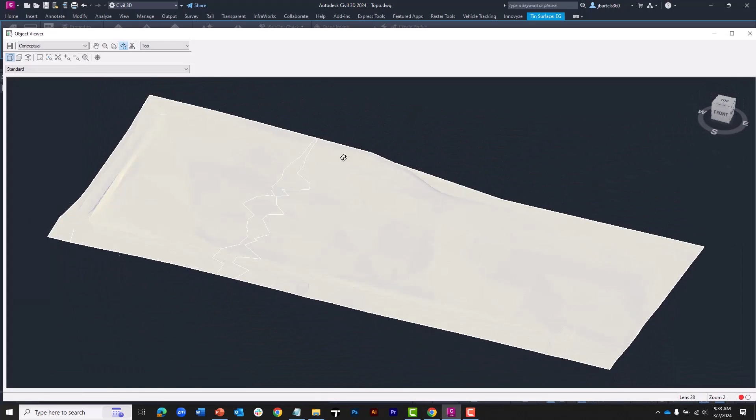What we see on screen is an example of the topography the surveyors have been working on within their team space. We'll say they've been creating break lines, assigning points, and making edits to this. At this point now that it's ready to be shared, we can share it. I just wanted you to see it. In fact, if I click on this for a second, we can bring this up in the object viewer—that's just a rough idea of what this surface looks like. Let's close that up, and I'm going to close this.

To share the file, they are going to go to their web browser to create the package. I'm going to simulate that I'm Morty. Let me click to go into another web browser here, and I will go into the Autodesk Construction Cloud. We are going to log in as Morty—I'm going to put in his username and password. When Morty gets into the cloud, we'll grab that Briarwood Phase 1 project.

Notice what Morty can see in here—these are the only folders for which Morty has rights. From here, I'm going to go to Design Collaboration.

When I go to Design Collaboration, it reverts to the home screen. This is where I can see the name of the current team, surveyors, and down below I can see the contents of their team space—Topo.dwg. Remember, they had the Alta file and the other one, but we're not seeing that because it's only looking at the base DWGs folder.

When they want to share, they will do that using a timeline. We can access the timeline by clicking this button at the top—it's a lot like a drawer. When I click, that will open up. From here, we can see the timeline associated with each team. Now, I'm not seeing the engineer team yet. I won't see that timeline until the engineer actually shares something. So for right now, this is just showing us the word shared.

The way the timelines work, we can see that it's colorized based on a unit of time, and these are days currently. We can navigate this by dragging these sliders left and right to reduce the number of days, then drag this back and forth. I can also put my cursor inside this timeline and roll the wheel back and forth, or hold the left mouse button down if I'm zoomed in to drag left and right.

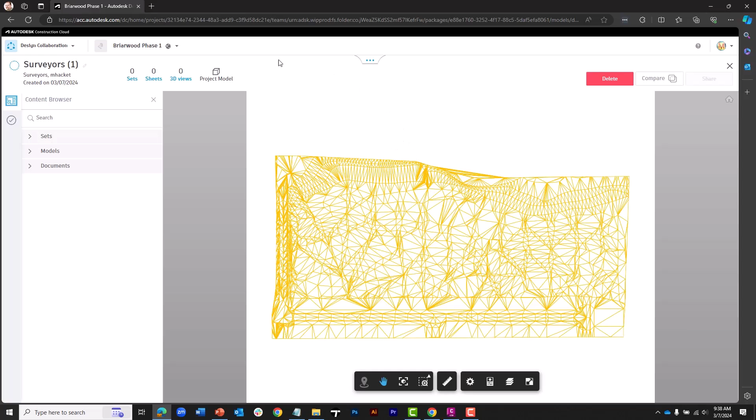To create a package, I'm going to come down and click the Add button. When you click the Add button, it will open up this area where we can generate the package. We can give the package a name. I can call this Topo Share, and I can click the check. Down here is where I can select the objects within my team space that I would like to share. We can share sets. Now, this is a Revit thing, so we don't have to worry about sets.

If I expand models, this shows us the DWG files or the models that are within our team space. Once again, another great reason for minimizing things. I'm going to choose that topo file. And then documents, I can share Word documents, PDFs, things like that. If I click Add Documents, currently it's going to say it doesn't find anything because it's only looking in that base DWGs folder. If I had a Documents folder and I put documents in there, I could attach documents to this package. Let me close this.

Think of a package as being a lot like a zip file, very similar to that. In this case, I've selected my topo model to share. I'm going to click Save. And when I save that, let me open this drawer up again.

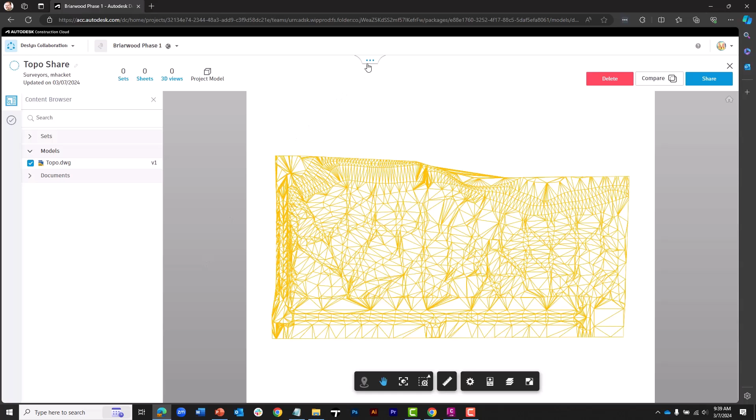I just want to show you the icon. You can see that I've got a circle in the timeline, and it's kind of a dotted edge. This shows us that a package has been created, but it's not yet been shared. The benefit of doing that is we could come back to this later and delete the package. I could also jump in and I could edit this if I wanted to.

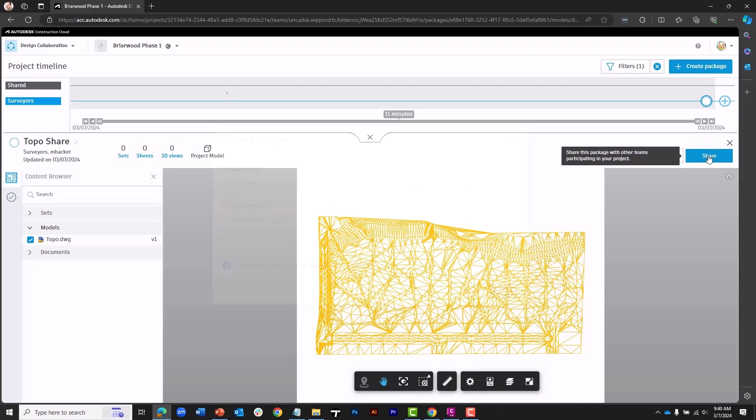I'm going to share it. Let me click Share. When we share a package, I can give it a description. This is the existing ground topography. Let's click Share.

When you share a package, it is replicated into that shared folder. Let me open the drawer up here again, and we can see the icon has changed to a solid circle. This is very easy now. Each team, when you're looking in your team space, you can see if you have saved packages, they'd be open circles, and the closed circles would be ones that you shared.

All right, let's look at things from the engineer's perspective. I'm going to jump to a different browser. I'm in this browser now, operating as the engineering team. Let me go to Home.

When a package is shared, an email can be sent to let the other teams know. To control the emails, here on the Home area of Design Collaboration, there's an email icon. If you click right here is where you can turn on those notifications. That way, each time there's a transaction, you'll be notified. So we'll assume I got that notification.

If I expand the timeline on my end, down below here, I can see my team name and the contents of my team space. I don't have any files in there right now. I can also see the surveyor's timeline or swim lane. This closed circle shows me that they have shared a package.

If I hover over this icon, I can see the name of the package and when it was shared. I'm going to click on this. When I click on the package, I can see the contents down below, the name, the description, and the contents divided up by different types.

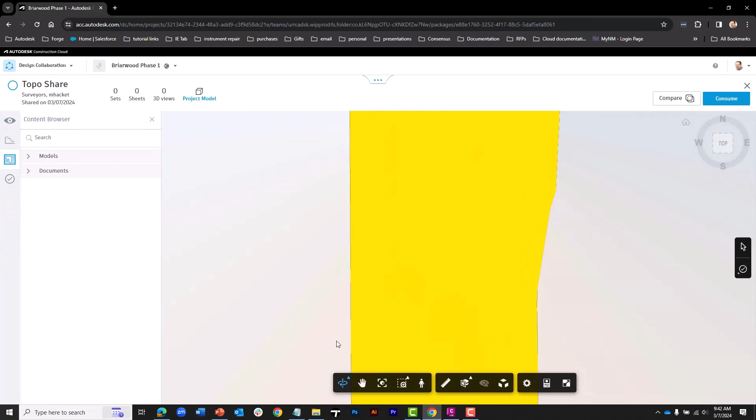It has one model in it. There's the model there. If I want to view that model, I can click Explore. We have a view cube, just like within the Civil 3D environment. I can also zoom extents. The viewer within the web browser is very similar to the object viewer we have in Civil 3D, so this is nice to get a cursory view of this file.

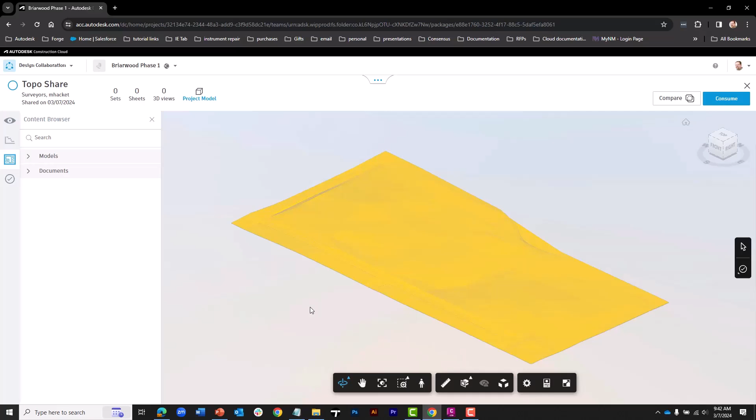If you actually wanted to pull elevations and things like that, the best place to view that would be within Civil 3D. We'll touch on that here in a second. I'm going to click Consume, and I will consume that to my team space.

Let's go back to Docs for a second. I just want to talk about that whole viewing concept. When we created our team spaces, we assigned permissions. As an example, we'll look at this from Morty's perspective. If I right-click on the Surveyor folder and go to Permission Settings, you can see that it gave Morty edit permissions when I set up that team space.

And he would have edit permissions to not only the team space, but to all of the folders below - it's inherited. We saw this when we talked about permissions a few sessions ago. Having said that, if we go to the shared folder, Morty gets edit access to the surveyors folder because when he shares, he needs the ability to edit and place things in there. However, for other team folders, it automatically sets Morty to view only.

So anything that the engineer would share to the shared folder, Morty would be able to open that within Civil 3D and view it and take measurements or elevations or things like that. And you don't have to worry about damaging the file because they don't have the rights to change it. We can see here that under surveyors, that's where the file was shared.

Let's go to engineers. When I consumed it in my consumed folder now, notice great organization - it creates a folder in consumed called surveyors, so I know what team it came from. And there's the file that I consumed from them. Let's create a data shortcut to it.

I am going to jump into Civil 3D, and we're looking at this now from the engineer's perspective. Let's go to Open, and I am going to jump to Autodesk Docs, go to my account, and go to Briarwood. I'm going to be going here a lot. Let me drag that over, I'll create a shortcut to it.

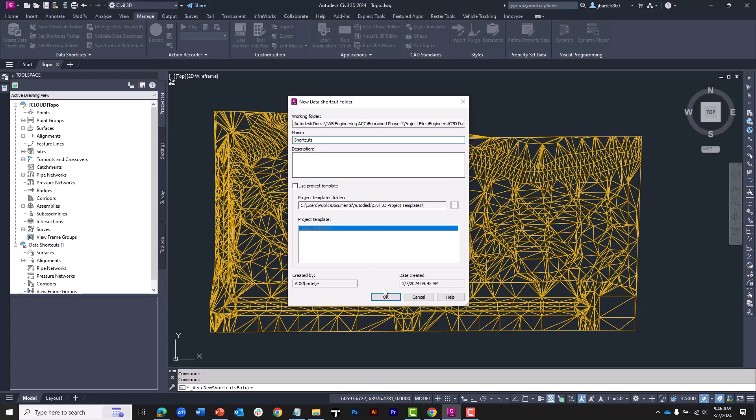That's the nice thing about this concept - each team space can have their own data shortcuts folder within it. I'm going to choose this as the working folder within my team. Let's click Select Folder, and then I will choose New Shortcuts folder. Within that Civil 3D Data folder within my team, I'm just going to create a folder called Shortcuts. You can use the names that you like. I'll click OK - I've set up my data shortcuts for my team. I can now go to Create Data Shortcuts.

I want to add this existing ground surface that I got from the surveyor to my project. Each team is almost like its own project. There's that existing ground surface. I can then close this drawing. Save changes? No, I didn't do anything to the file. I just put a pointer to it.

In fact, it wouldn't make any sense to save it anyway, because if the surveyor puts a new version in the shared folder, when I consume it, it's going to overwrite the one in my consumed folder. You're not supposed to edit things in consumed, because those files are essentially controlled by someone else.

Let's create a new file now. I want to leverage that topo that we got from the surveyor. So I'm going to create a new file. And still as engineer, I'm going to do Save As, and save this in Briarwood Phase 1, in my team space, under base DWGs, and call this Surface Profile.

Now that I've saved this file within the cloud, I can come over and reference that data shortcut that I made. We'll drag this in, and then I will do a zoom extent so we can see that.

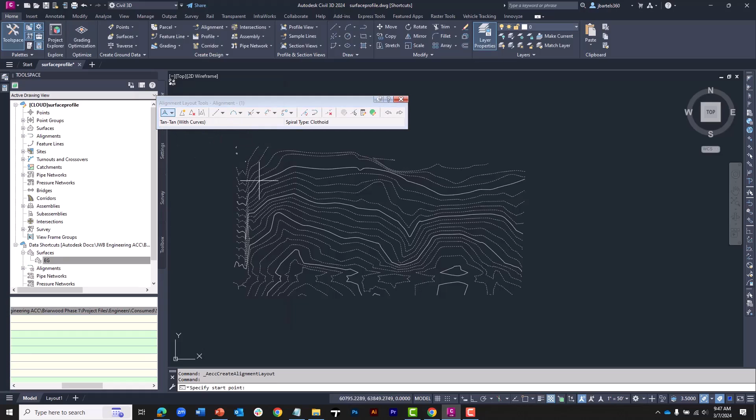And then I'm just going to generate an alignment. We'll create a quick one here just in the interest of time. We'll generate the alignment, won't bother with a name, and I'm going to put some curves in that. Then I will click the alignment and create a surface profile from that.

Let's click Add, Draw on Profile View, Create Profile View, and I'll place that over here. So there is my surface profile through the data that I received from the surveyor. I am going to go ahead and save this drawing, and I will close out.

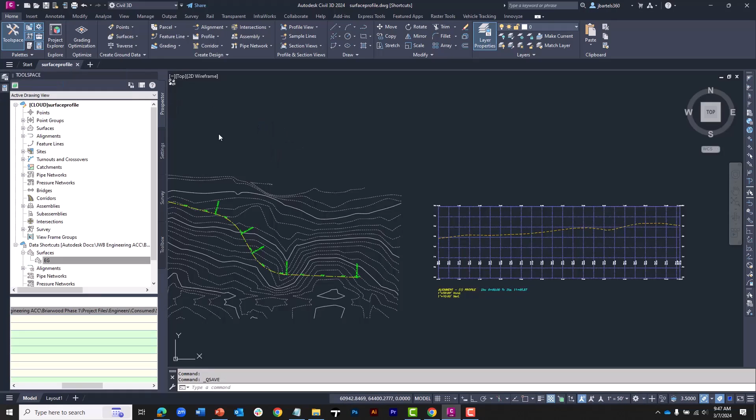Now, let's look at things from Morty's perspective again. Maybe things changed, the existing topography had some updates. We're going to assume we're Morty now. I'm going to go to Open. In the Briarwood Phase 1 project, the surveyor, once again, would only be able to see these two folders. The surveyor would go into base drawings and open up their topography.

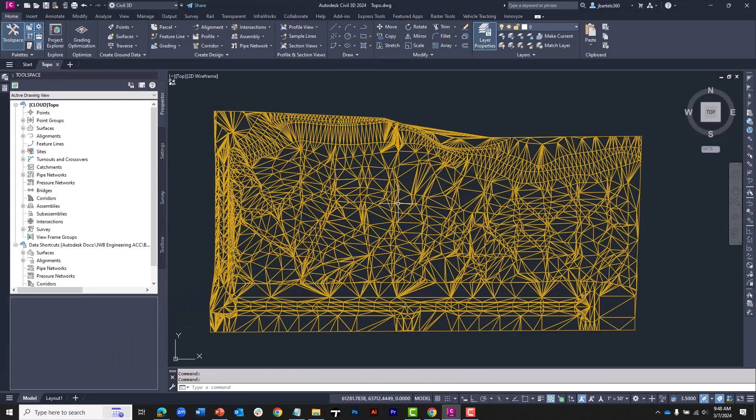This is where they would be making modifications to it. And when I make modifications to this, in this case, I'm just going to make something that's going to be painfully obvious to see. In this file, I've got some break lines that are at grossly exaggerated elevations. I'm just going to add these break lines to the surface.

I will go to Modify. I want to modify a surface. I want to add data. I want to add break lines. Not going to worry about the descriptions. I'm going to go ahead and grab these two. When I press Enter, you can see the change.

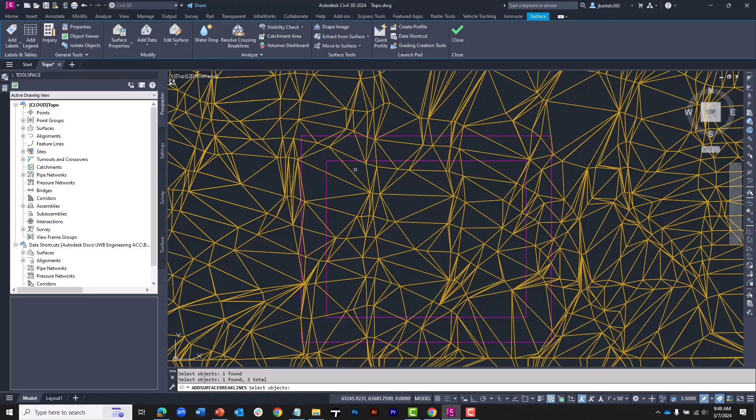If I click on that surface, go to Object Viewer - okay, not a great change, but it's going to be an obvious change. Let me close this, and we will save this file.

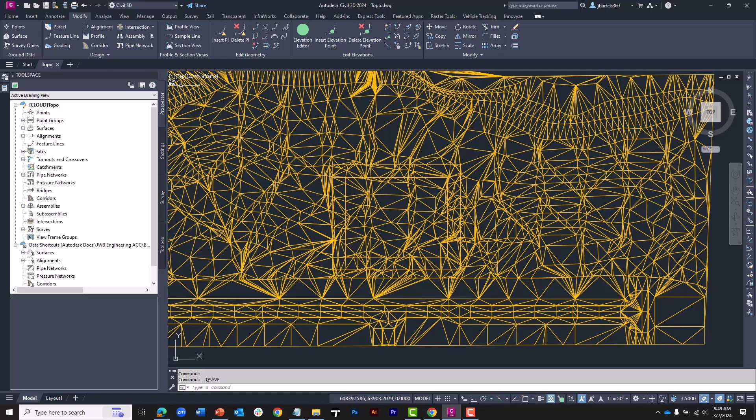As we saw in previous sessions, this file was saved to Desktop Connector. It's now being synced back to the cloud. At this point, they would close out of the drawing. This is now an updated version. They're now going to share a package containing this file with the other teams.

As the surveyor, we're going to go back to the web browser, and here as Morty under Design Collaboration, I'm going to go to Home. Here on the home screen, I can see the team name and the contents of their team space down below. Once again, they've just got the one topo file in there. The drawer is open still, allowing me to see the timeline. I can see the first package that we sent.

I would like to send a new package. To create a new package, I could click the plus to do that, or I could click the button up here. Even faster, if you're creating a package identical to a previous package, I can simply click on the previous package and choose Reuse.

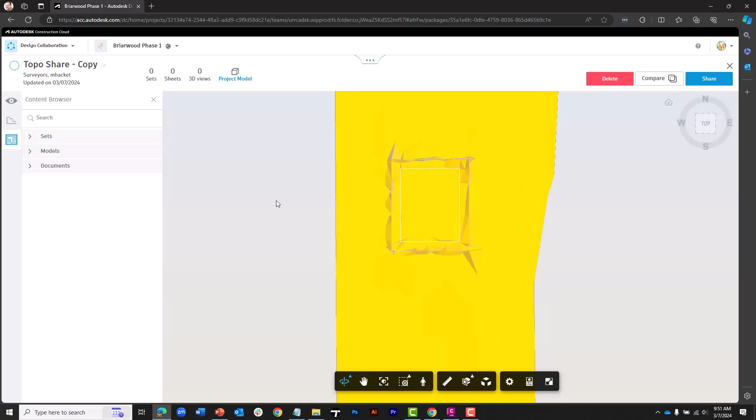I want to reuse that one, and it's telling us, hey, a model's been updated since you last edited this package, do you want to update? Yes, I want to make sure my new package includes the latest file, and you can see that there. All right, so it already selected the model for me. I can give this a name - we'll call this Updated Topo.

And then I can come over and click Share. I updated the topo with some new break lines. And we'll click Share.

Once that's been shared, I'm going to click the Home button to clean the screen up here. Then I'll open up the drawer, and you can see now I've got a pair of icons showing me packages that have been shared with the other teams.

I'm going to go back to the engineering team now. They got an email letting them know the surveyor shared some new stuff. So as the engineering team, I'll go to Design Collaboration and take a look at what we got. It's defaulting to the engineers team. Let me open up the drawer. You can see on my timeline, I'm seeing the additional drawings like I mentioned before.

The engineers now have the surface profile drawing that's been saved twice. I'm going to filter out those additional models just to show the swim lanes associated with packages. We can see the surveyor team, and this is the latest package that has been sent. If I hover over that, I can see the name, description, and date. I can click on that and view the contents. It's got one model in it, with name and description.

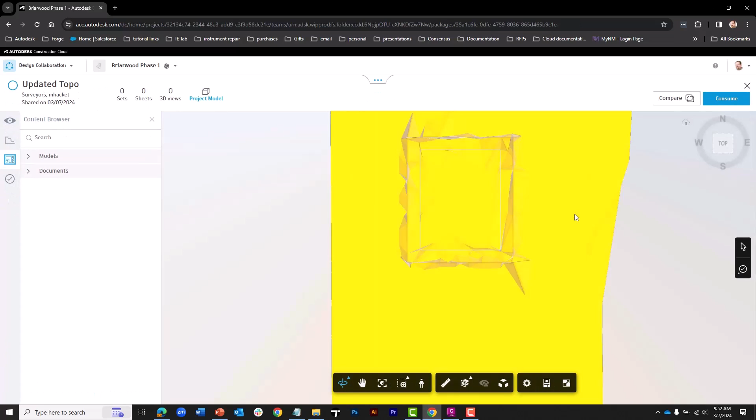I can explore this. As we saw earlier, this is the lightweight way to view it, a lot like Object Viewer. If I wanted to really get in and do detailed reviewing, I could do this through Civil 3D. For right now, we'll say this is good. I'm going to consume it. When I consume it, it pulls the latest version into my team space.

We can see that if I go to Docs, and I go to Engineers, and I go to Consumed, under Surveyors, once again well organized, you can see there's the latest version has been placed in there.

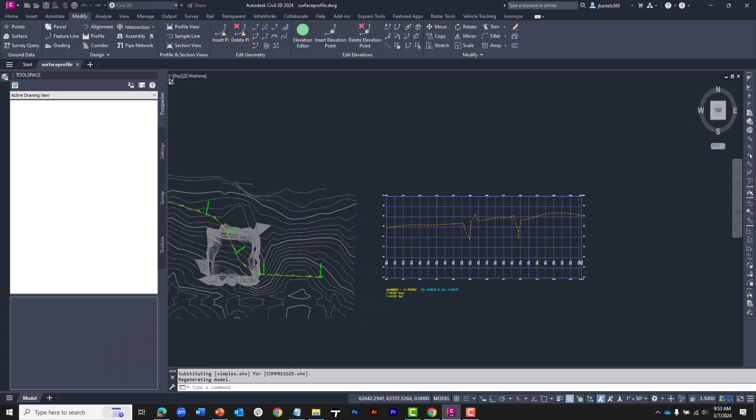For that reason, when I go to Civil 3D and open up that surface profile drawing, let's go back to Briarwood, Project Files. I'm an engineer, let me go into Engineers. I'm going to go to Base Drawings and open up Surface Profile. When this opens up, it will version up my data shortcut, which in turn updates my profile.

Now, in this example, I created team spaces and I'm just sharing a topography. You can share utilities, you can share corridors, any of the civil objects can be shared this way. DWG files can be shared this way for the purpose of creating external references that update automatically. So using the team space concept, we can have an environment where multiple teams can have their own collaborative space within a Civil 3D project. Each team can work independently on their own content and share it with the other teams when they're ready.

Shared packages are saved in a centralized shared folder that all teams can access for the purpose of reviewing files. After reviewing files, the teams can consume them for the purpose of creating external references or data shortcuts. In the future, when newer versions of files are shared, teams can simply consume the new versions to update any external references or data shortcuts within their team space.

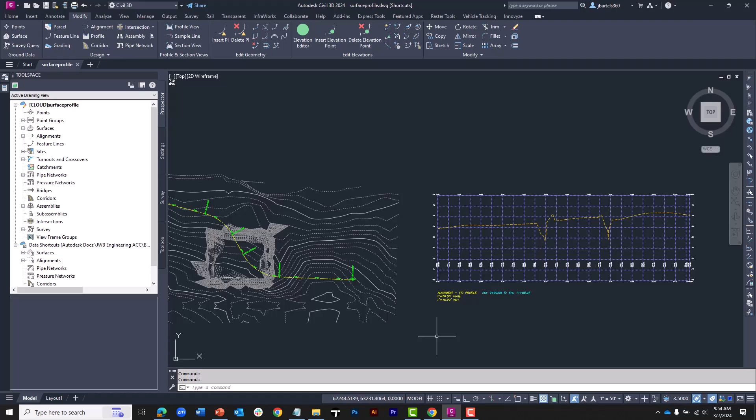All right, I'm going to jump back to my PowerPoints. We talked about a lot of things today. We talked about the team space concept. We just went over that again here a second ago.

We looked at how we could create and configure team spaces. We looked at how we could navigate the project timeline. The timeline is where we see the status of the files that we've shared, as well as the files that are within our team space. We saw how we could navigate that project timeline and how we could use it to create packages. We saw how we could share packages with other teams. We saw how we could consume packages into a team space and have it update a data shortcut.